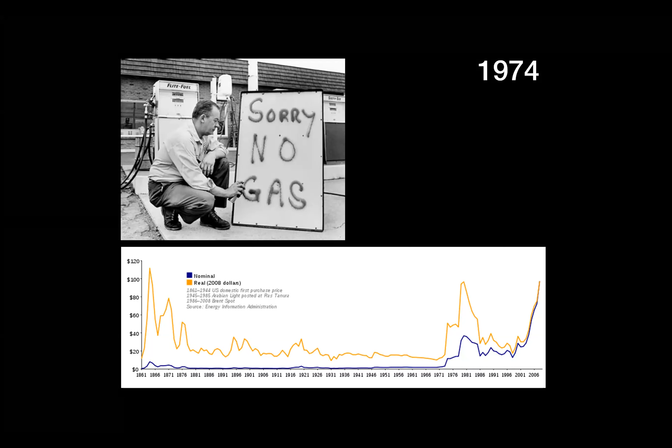And still not, it's a real delay. Should I click through it? Yeah, I'll click through it now. Okay, I'll just say next. Okay, right.

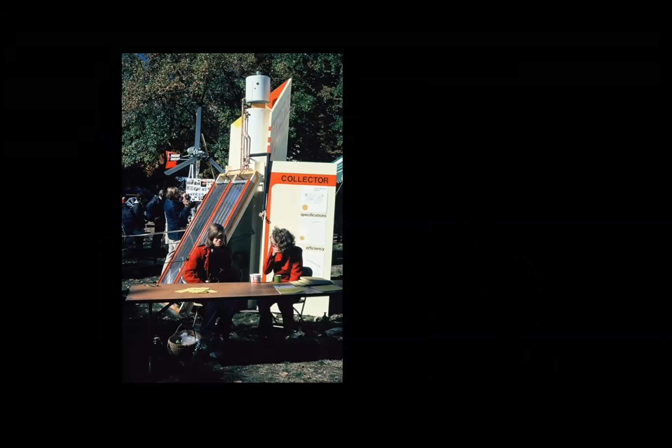So I was in the midst of a course where I was looking at environmental design and architecture. We were looking at these kinds of things, and because people perceived there was a lack of fossil fuels—not fossil fuels damaging the environment, but a lack of fossil fuels—people were very interested in solar energy. So we were looking at architecture like this. This is me and my wife, and we started working with a guy who set up a solar collector business, so this is solar water heating. And I produced this as a thesis at Yale University, which had the posh title of Decentralized Service Systems for Housing.

And some smart guy from a publishing company came along and turned it into a book, called Energy for the Home. This was 1974. Bear in mind this huge shortage, panic shortage, much greater panic than there is now, because people thought the energy sources were disappearing. Anyway, this book sold 100,000 copies in the first year, and we made quite a bit of money out of it, which was very nice.

We came back to England and I finished my architecture education. A year after finishing it, I set up with Richard Fielden, and with the proceeds of that book, we bought a house in Bath, a 5-story Georgian house for £10,000, which you could do in those days. We set up the architecture shop in 1978. We weren't architects, we had hardly any experience at all. We were very interested in building, very interested in energy, and very interested in community. So that was where we were in '78.

In the first 12 years, we bought shops next to it and set up a practice of about 25 people by that stage. This is us all doing our semaphore happy birthday sign or something. But it was a practice that was completely founded on passive solar design, founded on social and environmental principles.

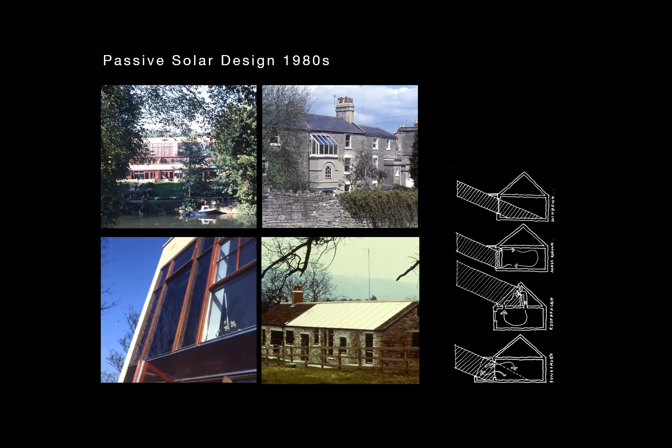We spent a lot of time in the first few years working with this very hippie organization in Bristol. This is about '78 to '80. It's a group of people who wanted to demonstrate how to insulate your home and how to generate solar energy in your home. So this is all voluntary work, working with a local pressure group.

It was called the Urban Centre for Appropriate Technology. Many of you will have heard of the Centre for Alternative Technology - that was a sister organization in North Wales.

We built this extraordinary project - the city gave us an old house to convert basically, and we demonstrated all kinds of ways in which you could insulate and renovate a house. We also talked about building a new house immediately next to it, which is a demonstration solar house.

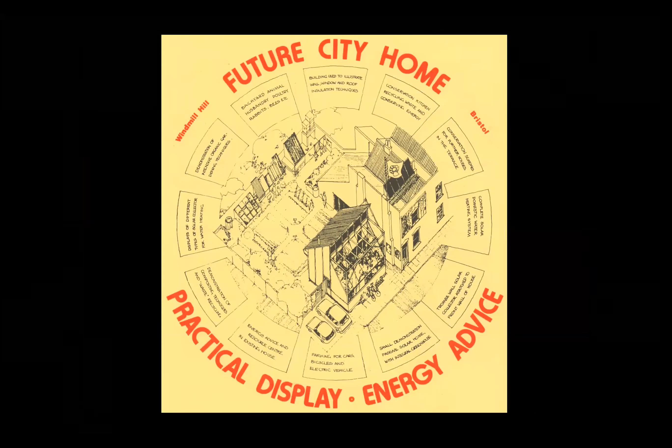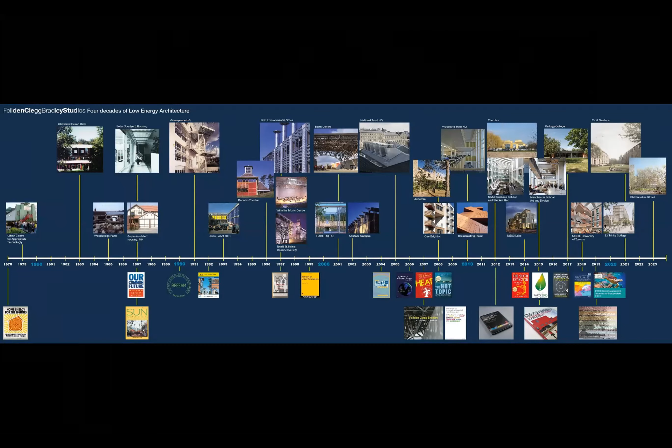So what I want to talk about for the next 15 minutes is really just 40 years of practice after that, starting from that little beginning. This is a chart we did which shows the beginnings of the practice there. I'm just going to take you through a few of these projects that show how we developed our expertise in low energy design.

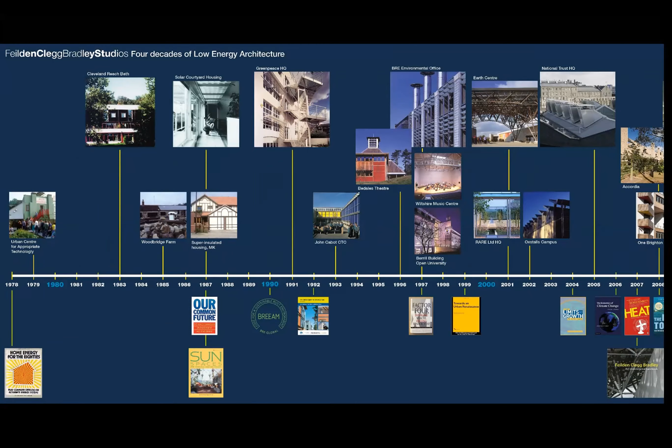So there we are, going right the way through. I hadn't realized this was moving like this. That's okay, that's fine.

One of the first ones we did in '87 was a passive solar house in Milton Keynes. This has actually got quadruple glazing, mechanical ventilation, heat recovery - everything that you would expect these days as kind of standard if you were doing a passive house design. We were worried about overheating, but it didn't overheat.

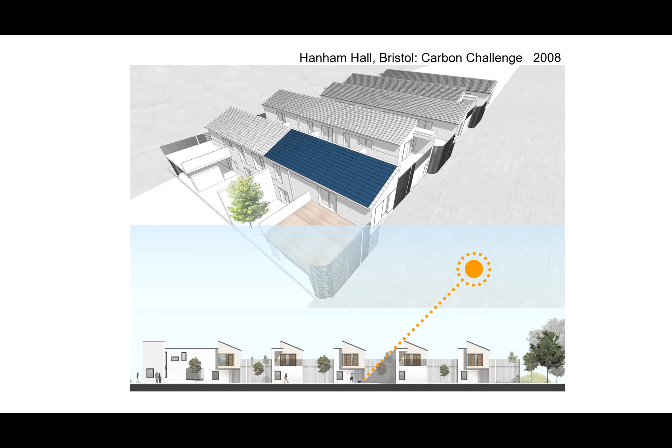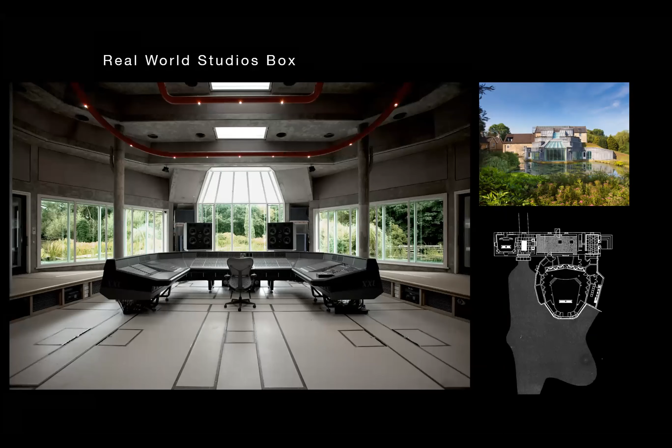At that time we were also doing projects like this, the Real World Studios for Peter Gabriel, which is again a really interesting, completely new type of building - a recording studio in the middle of the countryside, just outside Bath. Fantastic client, great fun.

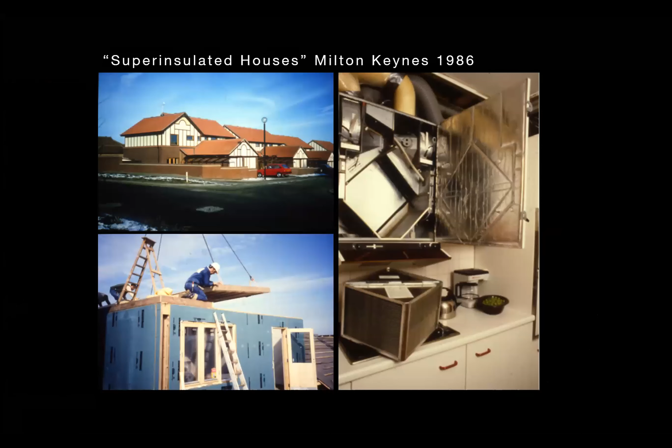We're also doing very tedious looking houses like this, but very different to a lot of houses that we've done. These were super insulated, prefabricated in Finland and brought to the site. No heating system in these houses, just a ventilation system with a tiny 1.5 kilowatt heater battery in it. So no conventional heating system, just relying on a heating bill of £30 a year for this house. We were doing this before people had really invented the whole passive house system, but this was basically to those standards.

We're also experimenting a lot with timber as a biomaterial, as a grown material, as a material that sequesters carbon.

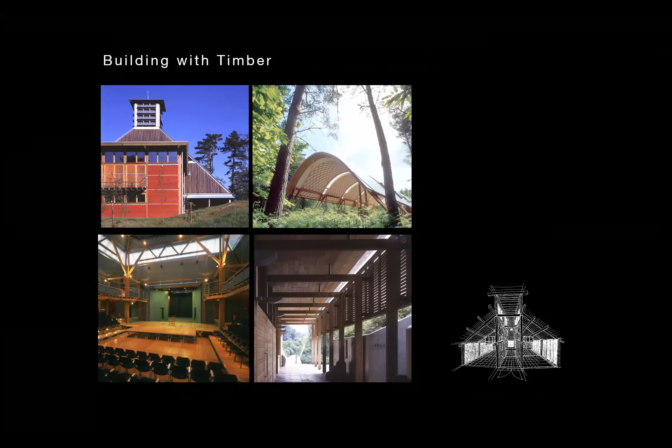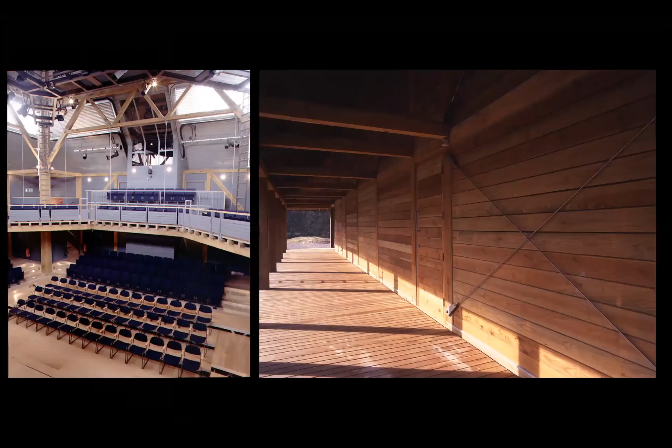In particular, we did this building, which I think is probably the lowest embodied energy we've ever done. This building has no concrete in it at all. It's on some little sheet pile foundations, and it's all made out of indigenous timber, oak frame, larch and Douglas fir cladding. It's a theatre in a school called Bedales near Petersfield in Hampshire.

We're also doing the first commercial building we did, not really a commercial building, but because we'd shown signs of interest in all of this work, Greenpeace came to us and said, we want to convert our building in Islington, which is still their headquarters. So that was quite a breakthrough for us, doing an office building in the mid 80s, early 90s I guess.

Then the BRE, the Building Research Establishment, came to us and said, we want to build an experimental low energy office building, which was a great project to get. So we produced this, and we're now actually converting that after 30 years.

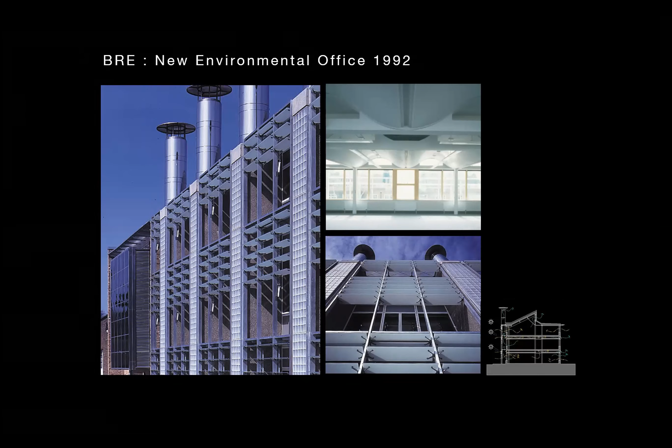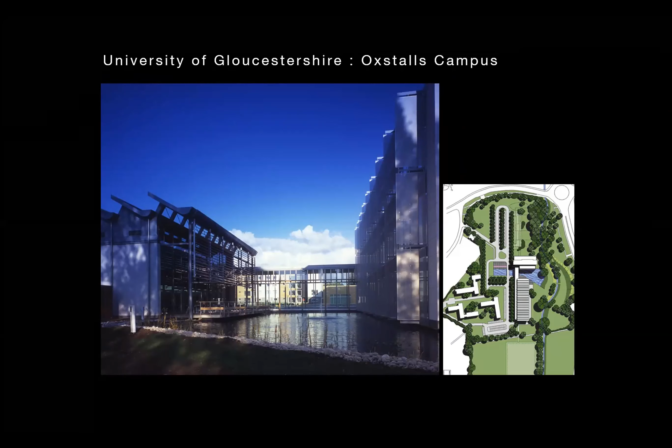And the Oxstalls campus at the University of Gloucestershire. I show this because it's the first big photovoltaic installation we did.

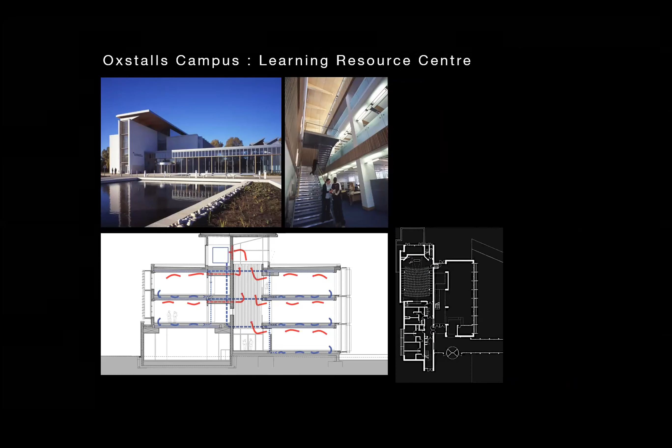Also a building that had an experimental ventilation system, looking at the way you can store energy in the floors of the building.

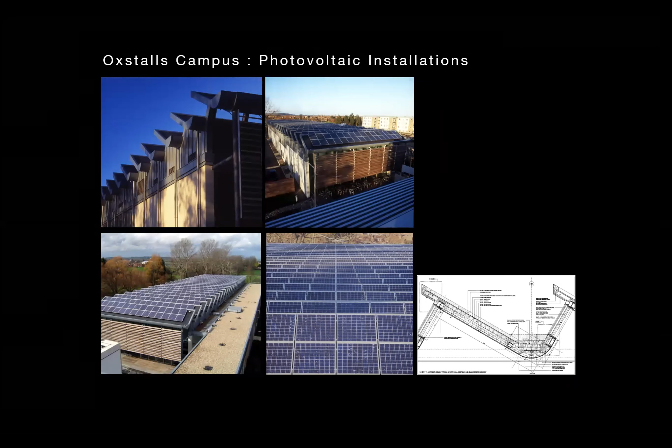This was the PV installation over a Northlight system over sports halls that actually then was a very substantial installation. And this one was the next biggest one, I suppose, that we did, which is a place called the Earth Center, photovoltaic canopy structure.

Designed with some amazing engineers and built by some amazing carpenters, in fact, using waste wood from Scottish pulp mills. This would have all gone into paper mills, but we reclaimed, in a sense, the Douglas fir poles and put together a structure that spanned over this environmental visitor center.

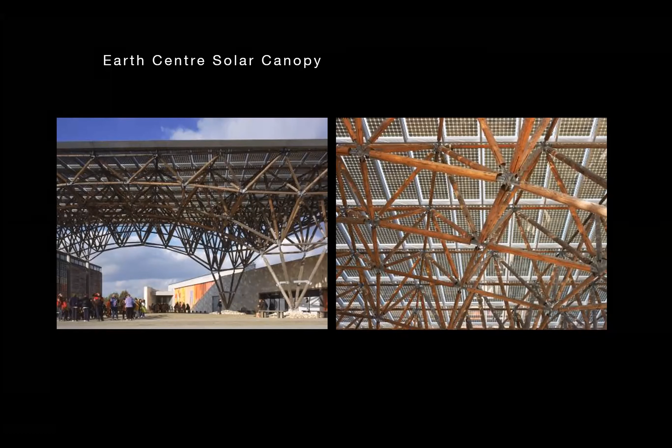Then a fairly big breakthrough in the mid 90s, or actually probably early 21st century, come to think of it—I can't remember when this was now—the new headquarters for the National Trust in Swindon, in the Brunel Yard there.

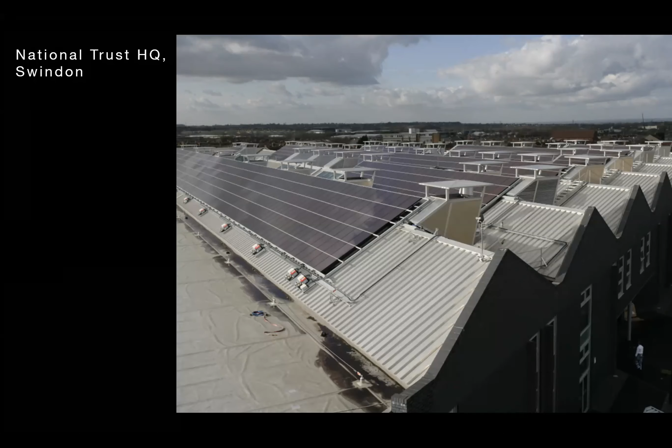Really looking at what the roof of the building can do in terms of absorbing solar energy through PV cells, as well as providing north lights and ventilation. So what you're looking at here is a very ordinary, relatively cheap building designed to sort of institutional development standards, entirely naturally lit, beautifully naturally lit, but quite ordinary shed-like spaces which are inhabited quite high density.

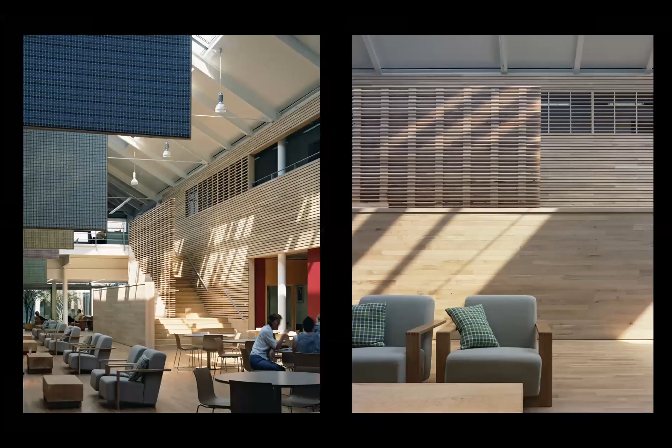Just two images of the interior spaces, again, using timber from about 20 of the different National Trust properties, and a welcoming space that welcomes visitors into the building.

And if you go through just these next four, basically what we're looking at here is a system that we developed with Max Fordhams, the environmental engineers, looking at how you measure a building and what's good practice in terms of kilograms of carbon dioxide per square meter per year, best practice of innovative and pioneering design.

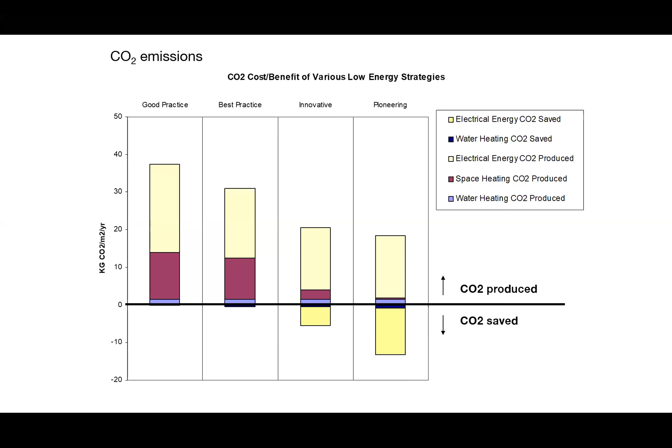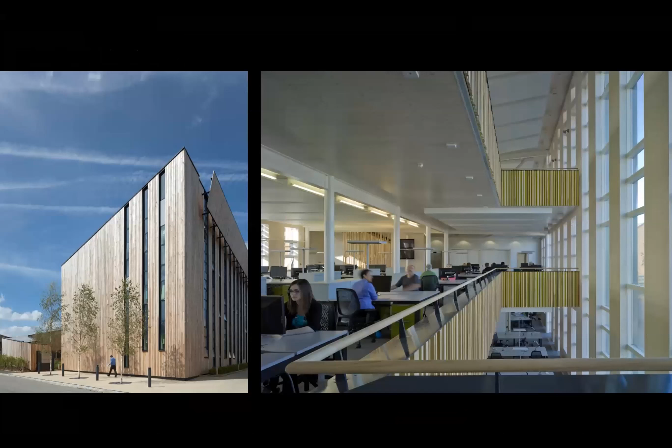Again, a very low embodied energy building here for the Woodland Trust in Grantham. Everything was made out of timber, including the floor plates, the walls - everything came to site as big cassette panels out of timber. It was one of the cheapest buildings we ever created, and also one of the best performing.

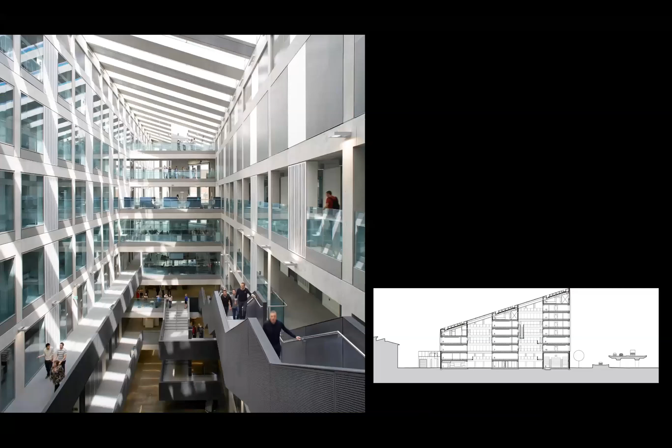You can see the section through the building on the right-hand side there, with two strong atria spaces providing natural light right the way down into the space, and plant rooms on the top, and a south-facing roof slope covered with photovoltaics. So on a much larger and almost industrial institutional scale, we're using the same principles we've used elsewhere.

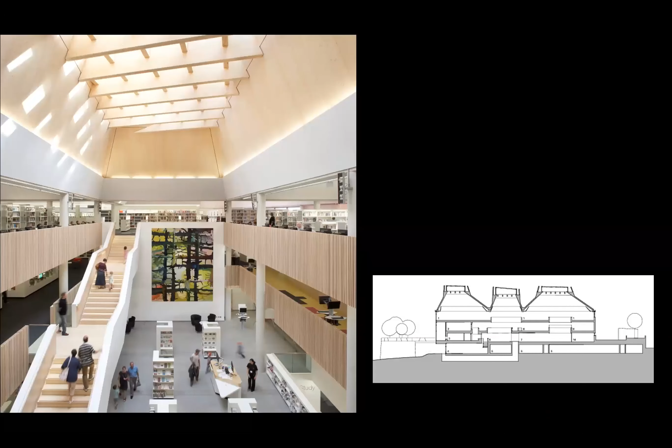And another university and city building - this was the City of Worcester Library, interesting from a perspective using lots of timber construction for these pyramidal roofs. Here we're using a completely naturally ventilated system - these pyramidal roofs ventilate through the top, and air is drawn in through underground and underfloor ducts underneath the section there.

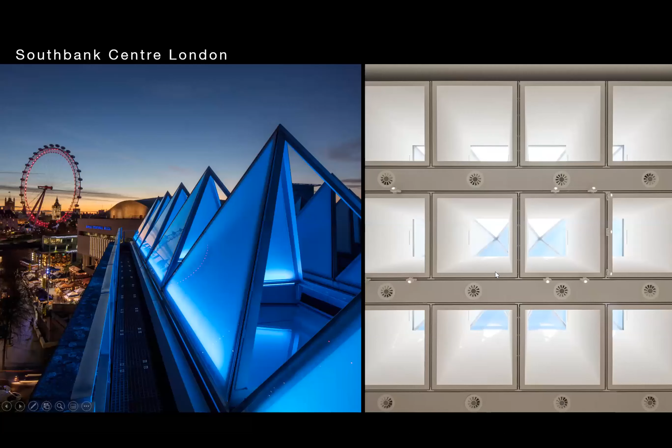We've also done a lot of work on existing buildings. This is the Hayward Gallery, replacing these iconic roof lights with a roof light system that works - the pyramids of glass become the shading devices over the roof lights.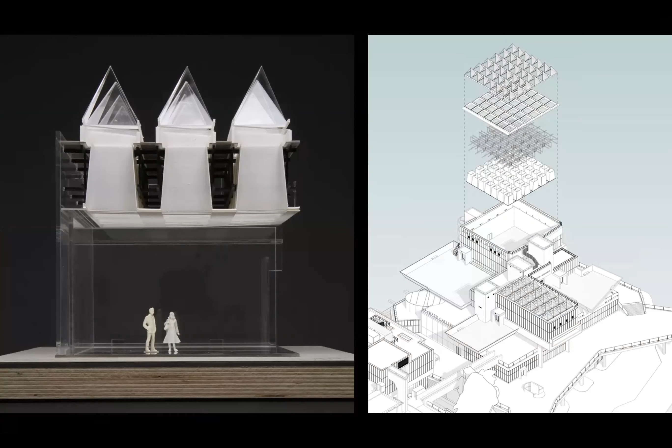Won't go into detail on that, but you can see - looking at the interior design of these spaces and rethinking the mechanical ventilation systems, taking a lot of energy use out of them just by working very closely with the M&E engineers.

Going abroad, going to Toronto, big university building there. We were asked to do that because of our interest in low energy design, interestingly - so it's taken us abroad, having this specialism.

Next one is the first passive house building we did, about 5 or 6 years ago - a very simple little building for the University of Oxford, who at that time had said all of their new buildings were passive house standards. And the next one is a building that we got planning permission for.

This one's in South London, looking at an entirely timber frame building adjacent to Clapham Station. We're looking for someone to build this out - we've got permission for it, and it's pretty much a net zero carbon building. The next one, which Joe might talk a little more about, is on site at the moment.

And here we're looking in intense detail at all of the materials that go into this building. It will be net zero carbon for the first 60 years of its life. It's built to passive house standards. It's entirely timber frame, but clad in brickwork. And it's going to be a really interesting precedent to study.

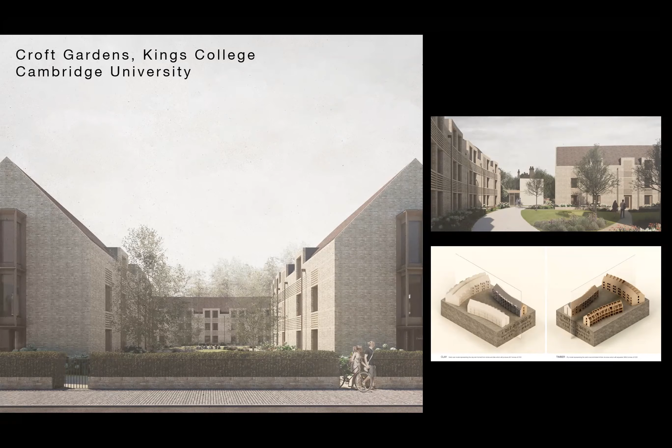Next, and I think that's the end. I think I've almost got through that in 20 minutes. So that's the history of the practice in a kind of nutshell. All I'd end up by saying is that the principles we set out at the beginning of working with socially motivated clients and environmentally motivated clients have enabled us to get the most extraordinary range of clients, as you can see, to work with, from Greenpeace, National Trust, Woodland Trust, all these university sector clients, and a lot of work within the educational sector. Everybody, but now we're doing a lot more work in the commercial sector because they too are very interested in what the future holds for us, for the planet.

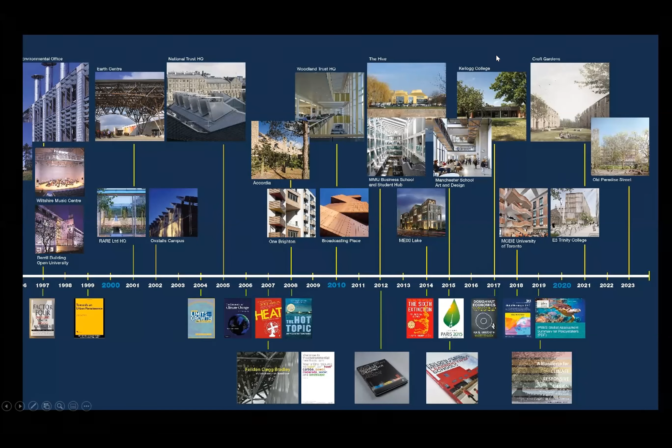I'll leave it there, Joe, and hand back to you.

Great, thanks Peter. And apologies if the slides were slightly out of order. No, a glamorous assistant role, yeah, a bit tricky.

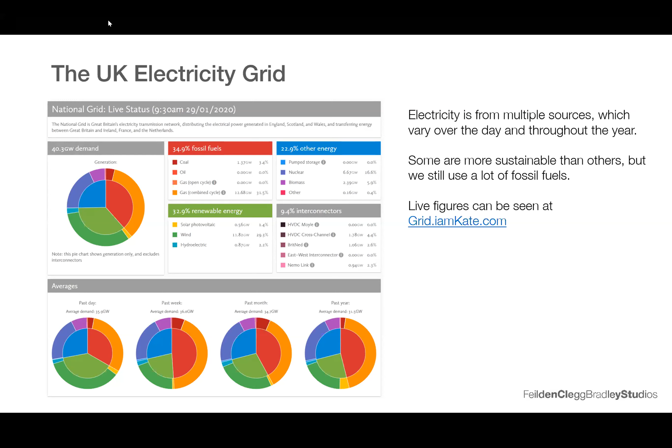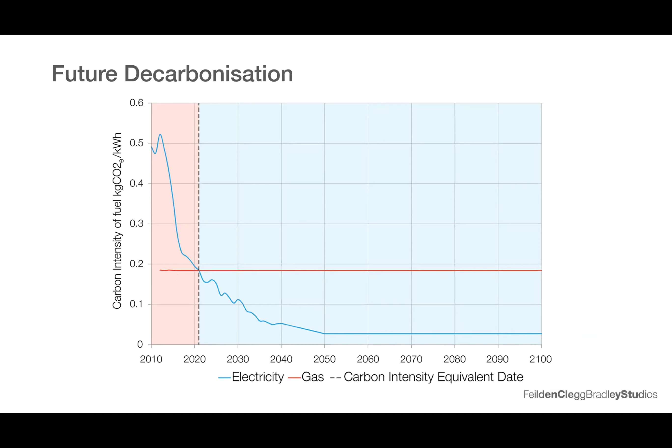So we're in this position where energy is becoming less of an issue in many ways. When we look at global emissions from buildings, this is what we're primarily concerned with. About nearly 40% of all emissions are from buildings. But actually there's another bit we don't talk about: 11% comes from the stuff we make buildings from.

Over the last couple of years this has really matured. Lots of people haven't really been able to keep on top of this, and now we're really starting to see it blossom and become very mainstream.

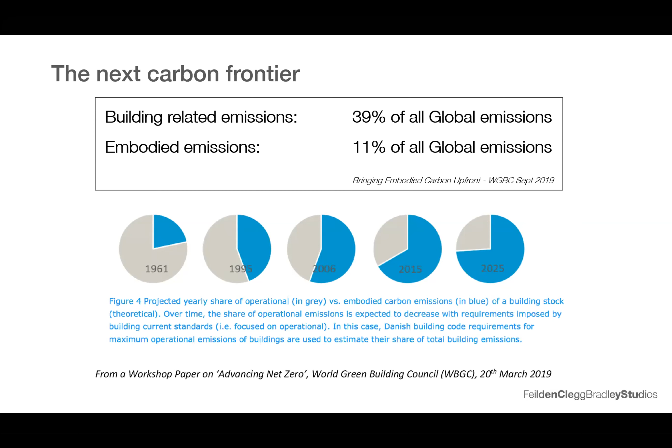But it's kind of a weird one. With energy, we've got meters - we just read the meter reading, send it off to the electricity board, and they tell us how much it's going to cost us, so we can work out the carbon for it. But materials are a slightly different thing to do.

What we have is this really techie life cycle assessment stages - this is for a British standard, though there's stuff for other materials as well. What it does is break down how we assess what's in the material, what makes it. So we've got this first bit, stages A1 to 3, which is cradle to gate - taking this stuff out of the ground, taking it to wherever it needs to go to be manufactured, and making it.

It might be that multiple things all come together, or it might just be one thing, but you can imagine that it can be quite massive.

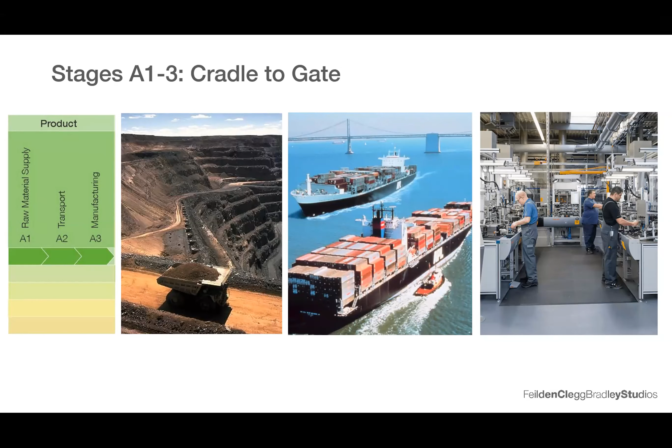Then there's your construction, so how you're building it - how do you get it to your site? Where's the factory it's been made in, and where does it get to from there? Is it being shipped by a big container ship? Is it coming by lorry? Is it being air freighted on a private jet? Whatever it is that's getting it to you, it all has carbon emissions associated with it.

And then how do we build it? Weirdly, when we think about building, we think of big JCBs or cranes and all that energy being used - typically not so bad. The big thing we do is things like plasterboard: we might throw away 10 to 15% of our plasterboard because we're cutting it to shape and just chuck it away. That's 10 to 15% more carbon instantly from that material. So it's about thinking about wastage and how we use that.

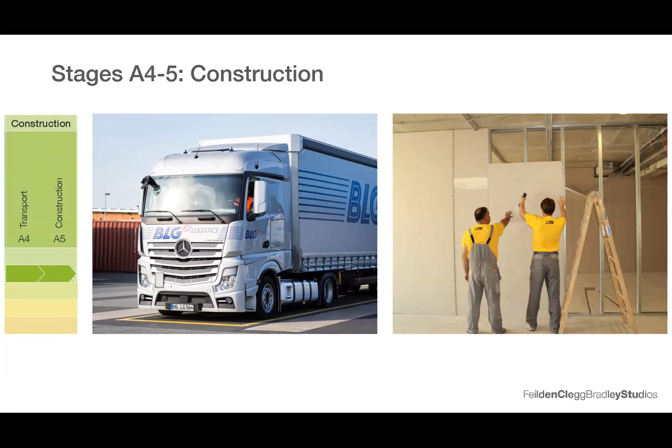And then there's this kind of operation side. How do we use the things for our buildings? Is it going to emit carbon just by being there? Some things will release CO2 as a byproduct, or refrigerants or something. Then we've got to look after it, maintain it, clean it, maybe give it a lick of paint, repair it. Maybe it needs a new door handle, a new window, bit of seating or whatever else. And eventually it'll just be knackered and it needs replacing.

So how often is that? Is it 5 years, 10 years, 100 years? Understanding the longevity of the components and how you replace them is key. Really think about that. And then also, if you take it out, can you refurbish it and put it back in? That'd be amazing, rather than getting a brand new bit of stuff shipped from wherever.

These two here are about operational. There's water use. We don't talk a lot about water, but we really should. It doesn't really have a lot of carbon emissions associated with it, but it's a precious resource. So that's something that's really key.

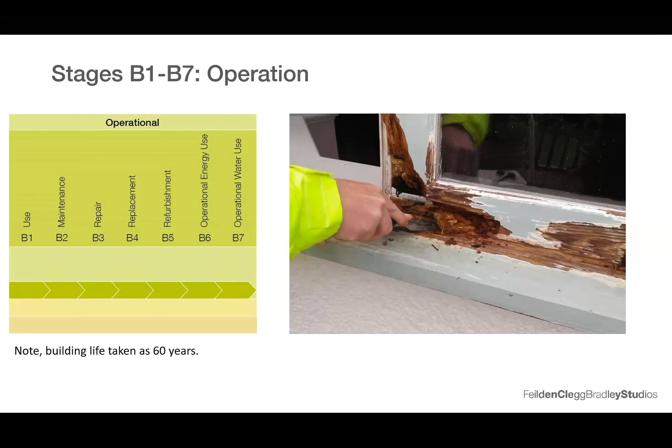And then at some point, nothing lasts forever, it's got to come down. Is it a big JCB that piles in and smashes it all up, ships it out to landfill? Maybe it doesn't make it to landfill, maybe it gets burnt and it turns into energy for a suburb of London or wherever else.

Can you separate the items out so they could be recycled? Think about if they're glued together, you can't really take glue apart. If it's mechanically fixed, you can just take the screws off and you can have your steel and your wood or whatever else. They can go to their own special waste streams where they can be processed properly. So think about all these kind of bits. It really feeds into this next life bit.

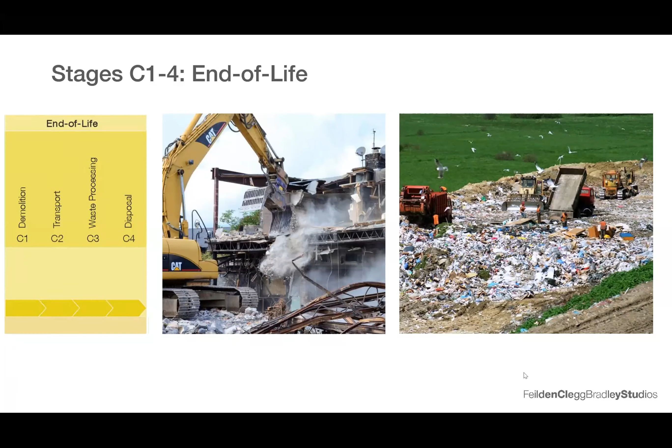Understanding what is it that stops you just reusing something in the first place. So always go for reuse. If you can get something reused, it's very low energy, very low carbon, it's perfect. If you can't do that, can you recover some of it? Can you repurpose it? Can you clean it and alter it in some way? And the very last thing you do is recycle it.

Recycling very often means you get a lower grade material out at the end of it. There's lots of people working on how do you go from a material to a higher grade. That's one big avenue, really interesting. Anyway, so well worth a look at.

But how do you design things to enable that? It could be, for us, things like structures that are bolted rather than big concrete things which are cast in. How do you take them apart? So, really interesting, pioneering bit of work.

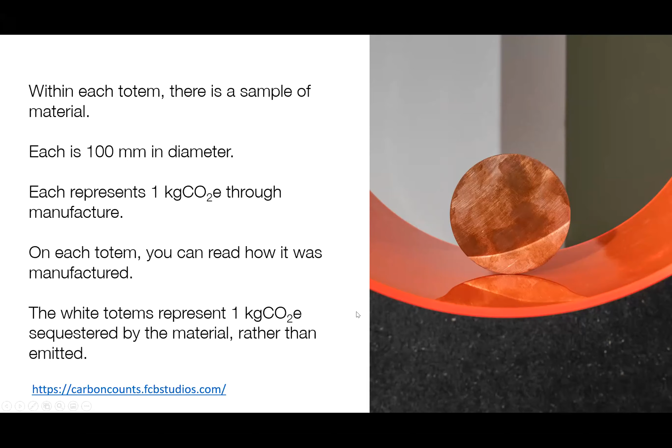We've turned it into a web page so you can all go and have a look at it there - it's well worth a look. It's got a bit more discussion, you can look at all the different materials. Each one has a little idea of just what it's taken to go from nothing to that material, really quick, nice and easy. It's only A1 to A3, so it's only cradle to gate - we haven't done transport to site and these kind of things.

So kind of interesting - the other thing we have are white totems. That's where materials have absorbed 1 kilogram of carbon out of the atmosphere. So this is a lump of cross-laminated timber - kind of a nice little thing you can compare. We have a bamboo one as well.

So we had two, and the bamboo one is much bigger because you need far more bamboo to absorb 1 kilogram of CO2 - so it's not quite as efficient. Plus you need to compress it and squish it and glue it and stuff.

That's great - embodied carbon's fantastic, I could talk about that all day, and I do quite often. But I can hear you all asking, I'm sure, what about everything else? That's one thing, isn't it? So this is what's emitting CO2 in the UK: electricity, it's residential, it's people, it's transport, it's businesses, it's agriculture, it's a very little bit of waste, interestingly.

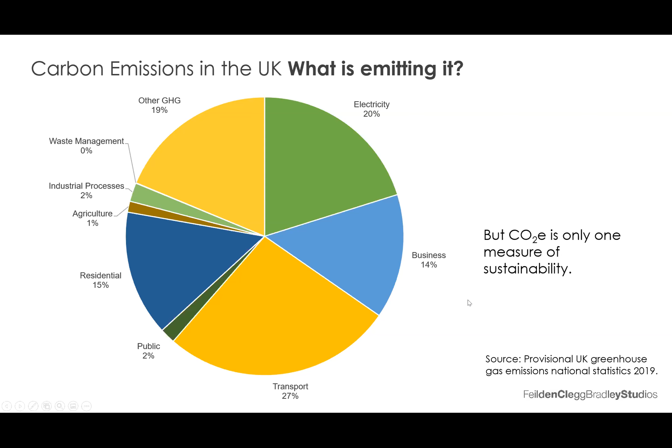But CO2 is just one thing, isn't it? It's very easy to focus on one particular aspect, and I do worry that we miss some of the beauty that sits around other places. So we have this here, which is our footprinting and biocapacity - I don't know if you've come across these kind of footprinting exercises. What we're effectively saying with these ideas is this is how much space is on the planet to create crops or grow livestock or whatever else it is, and this is how much we require. You can make a really quick idea of how much that footprint is in terms of global footprinting - so this kind of exercise.

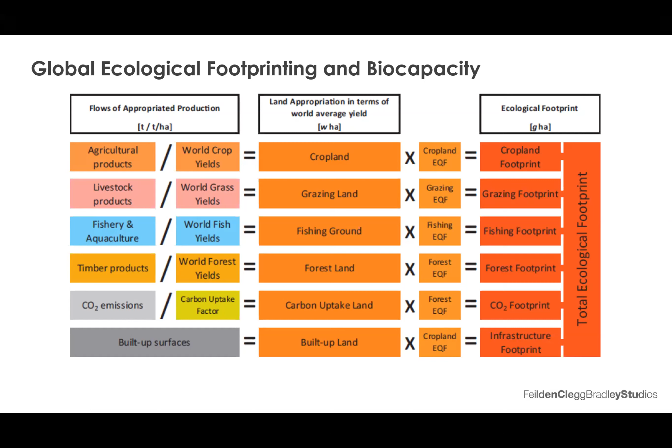It's actually really quite tricky to do, but there are institutes that do it. There's the Stockholm Environmental Institute, I think it is, they're kind of leaders for this.

In the UK, we use 3 planets worth of stuff, infrastructure, whatever else. It's a bit about home energy—the lights, computers, laptops. A bit about transport and how we get around—cars, bikes, even public transport. Food can be quite big, particularly if you're always eating steaks and burgers. And then the goods and our consumerist lifestyle—the things we absorb and use, clothes, whatever else.

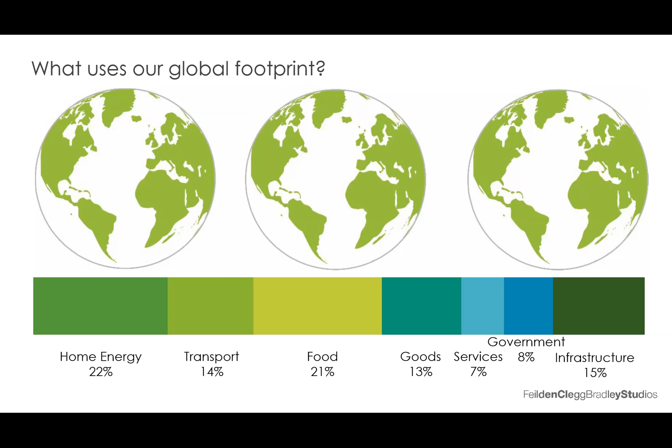We use One Planet Living as a way of assessing this. Instead of just focusing on one aspect of carbon, we use these 10 One Planet principles to get a broad, holistic overview. It's much broader than even the global footprinting I was showing earlier, and it's a way of thinking about sustainability that I think is incredibly useful.

There are other bits—land and nature, water, food, travel and transport, materials and waste, and energy—all hugely important, all have a piece to play, and all as equally important as each other in many ways.

Just a quick note on how you actually create a plan, because I know the aim of this is you'll be making a manifesto at some point. Visioning—we do a bit of visioning, that's the first step. Then we talk about how we do it, and think about what the outcomes would be against each of the principles.

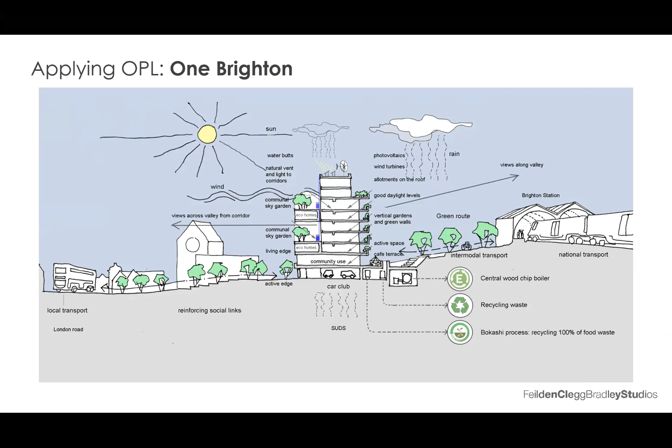But it wasn't just that. There's a nice picture of the allotments again, and the healthy materials and all that loveliness. But actually, we looked at the process of how you do it as well. So biodiesel for contractors' vehicles - back 10, 12 years ago, that's about the best thing we could do to reduce that. Electric vehicles didn't really exist. A green travel plan, so we had lots of showers so people could take the bus or cycle or whatever else. The healthy canteen on site was supposedly the best canteen on site anybody's ever had. And also, things like membership of local wildlife trust for contractors. A lot of these contractors probably hadn't had access to that. So how do you create that leveler for them?

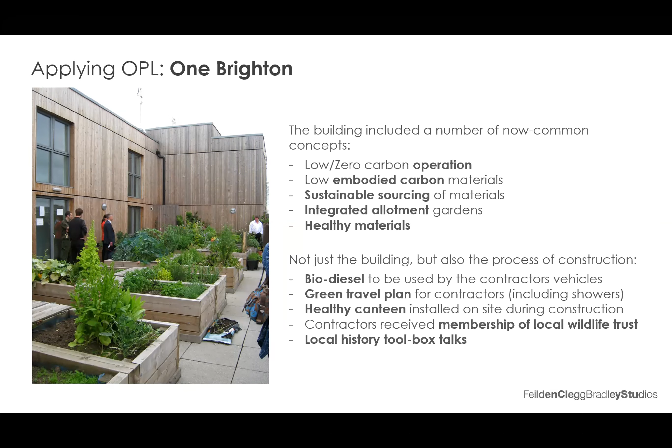Really lovely. And local history toolbox talks - somebody come in every day and say, look, this is this, this is this, this is the history of the place. Lovely, just for the contractors, you know, often maligned. So that's a really quick whistle-stop tour of embodied carbon and One Planet Living.

I'll stop sharing my screen. We can, if there's any burning questions, we can pick them up now. Yeah, put them in the chat. I mean, if we get anything now, then great. But I am suspecting that people might have questions to ask now, but it might be towards the end of the talk.

Sure, yeah. So in which case, I'll hand over to Charlotte then. Yeah, brilliant. Thanks, Joe. That's great. Cool, so, okay. Charlotte, if you're ready.

Yeah, sure. Just give me 2 seconds. I'll start sharing my screen. Oh, you're very quiet there, Charlotte. Oh, am I? Yep. Is that any better? Just a little bit. Sorry about that. I will try and shout very loud and clear. Very good, hopefully not deafen you all in the process. Okay, 2 seconds, there we go. I'm sharing now. Let me know when you can see it. Yeah. Yeah, is it all good?

Yeah, great. Cool. Okay, so hi guys, thanks for joining us all. Thanks to Joe and Peter as well. And I'm going to talk to you about one of our projects today at Feilden Clegg. So I'm Charlotte Knight, I work at Feilden Clegg Bradley Studios, and I'm going to talk to you about Pea Soup House. This is a project that we did in 2016 in the practice.

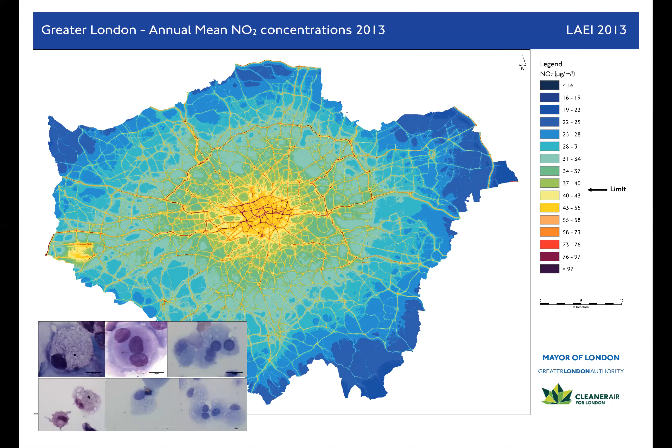So we were really interested in the data related to air pollution. King's College are in charge of monitoring and recording from different stations around London, and this is some of the data they've provided.

We wanted to take this and translate it into something, because air pollution is an invisible thing for us nowadays in London. Back in the 1950s Industrial Revolution, you could see air pollution—it was thick, sulfur dioxide, yellow fog. It's invisible now.

So we wanted to take this and make it into a visual architectural representation for people to see, in order to communicate and share with local communities.

We collaborated with King's College and used their data collected around London, and also their measurement system, which you can see in this colour diagram in the centre—this is their DEFRA air quality index that they use to measure it.

It's a sliding scale system, from 0 to 10. 0 is green and very low air pollution, and up in the red, the 10, is really, really high air pollution.

This diagram shows each day in Euston Road and what the air quality measurement was that day. You can see where you have really bad days down here in purple and red, and really good days green up here.

So this was a great way of making air quality visible. Playing on the term 'pea soupers,' the installation we designed was called Pea Soup House, to create a visual representation of air pollution as the first step to improving air quality.

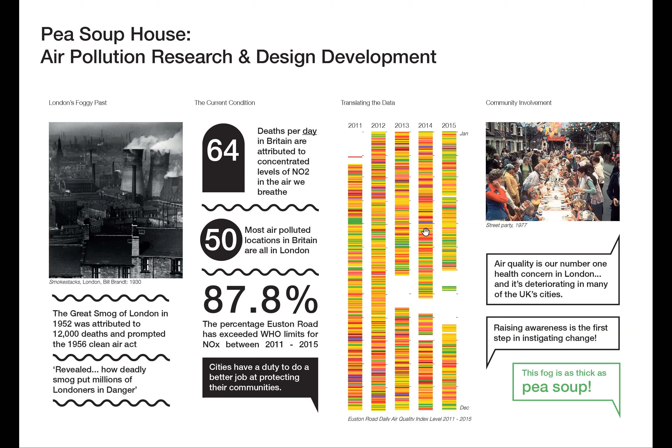We decided to do this in the form of serving soup from the structure. The flavour and colour of the provided soup is matched to the daily air quality index I just mentioned, and it quickly allows people to visualise their local air quality.

You can see here, on a good day you'd be served a pea and mint soup, and on a bad day, maybe a beetroot and horseradish. Luckily, we didn't need to serve that one at the time we were running the exhibition.

It was a cool way of engaging the local community through food—I mean, who doesn't love food? And the project helped raise public awareness of London's air quality through architecture, education, and event.

This is a drawing of our proposal for the structure. We decided to use timber battens, and each batten was painted to a colour representing the day of the air pollution from the data we had on Euston Road for 1 year.

Each side of an elevation of the structure had, you know, summer, winter—each of the 4 seasons on it.

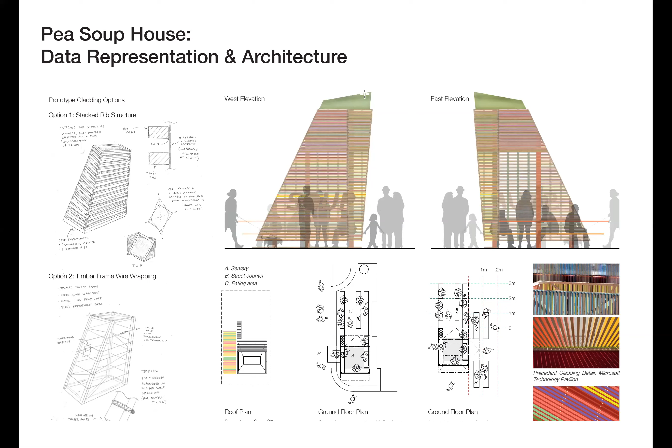And we decided to use low-cost carbon neutral materials, which created a sustainable structure, but it also made it really easily transportable, which was another method of being a little bit sustainable about our design.

So this is our final proposal that we submitted, the soup servery. The idea is that you come along the street and you'd be served soup out of the little hatch here, but you could also come within the structure and meet and engage in dialogue and conversation.

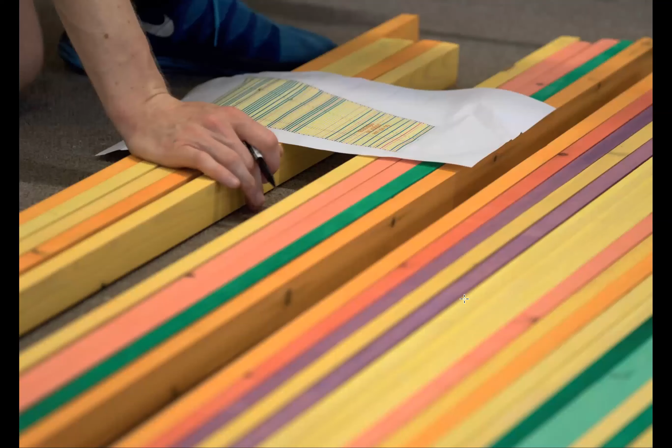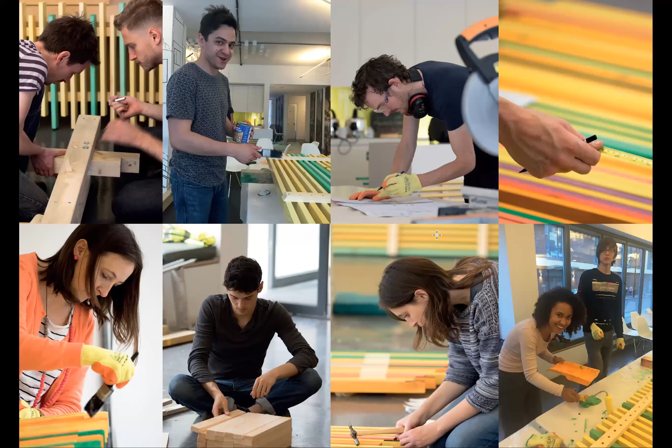This is just an image showing how we took that data and started to apply it to the building. And these are the most vital people ever in this project.

Our volunteers helped us throughout the whole project, from the early stages of design development up until construction, and came in and helped us every weekend to get this going, including our very own Joe as well.

Thanks, Joe. And then this was the final thing, getting it out onto the street and in use. So the most important thing about this project for me was the cross collaboration that we had on the project. We developed a multidisciplinary approach, working with many different people.

I've mentioned King's College already, who helped us with the data and translating it, as well as lectures and talks. We worked with Expedition Engineers, who were instrumental in the design of the structure, providing structural calculations. We also used Studio Mothership, who created the graphical appearance for all our exhibition work housed inside Pea Soup House, our flyers, lectures, talks, any graphical representation needed.

I think the most important collaboration was with the RIBA Young People's Forum, a group of young students at the Royal Institute of British Architects learning about architecture. They helped us from the beginning, right at the early design stages, where we held workshops with them. We all collaborated, got each other's ideas circulating, and tested out small ideas for Pea Soup House on little models, designing the color arrangement, etc. That was really great fun.

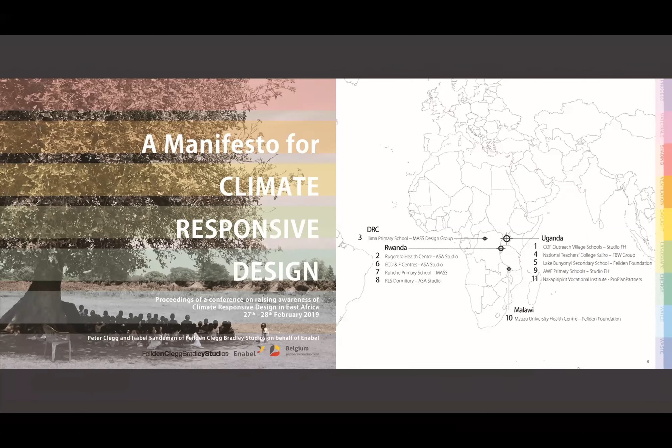So in response, we structured the book to teach the climate responsive design theory through a series of real life built exemplar projects from across Uganda, Rwanda, the DRC, and Malawi.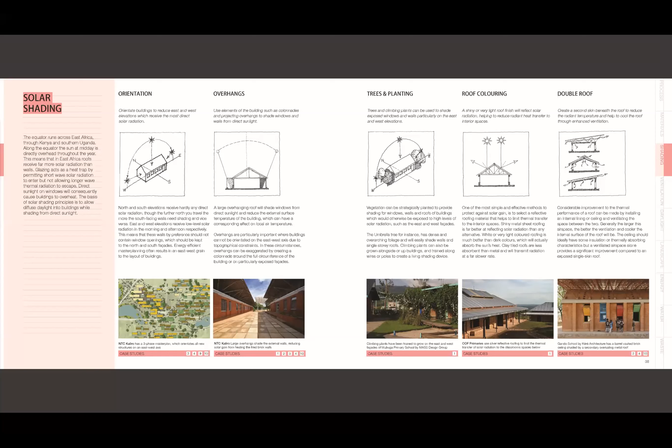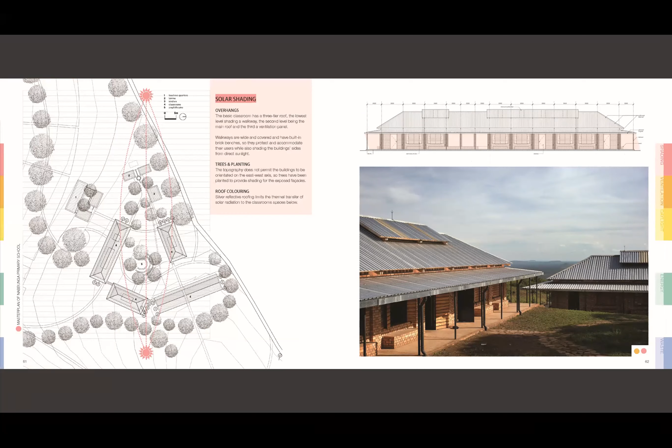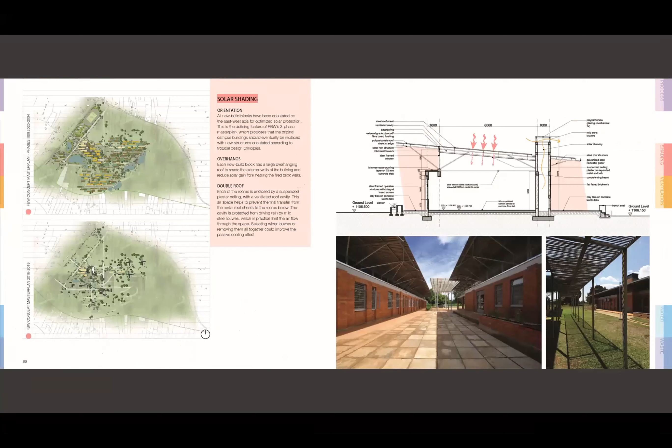And then these were fed into the practical application that was shown through a series of case studies. This is the Cotton On Foundation Primary Schools by Studio Felix Holland. This is Ilima Primary School by MASS Design Group. And the National Teacher Training College by FBW Group.

So what this structure did was enable us to provide an informative publication that would aid professional development in the region, but also provided a platform by which to showcase local practitioners' sustainable projects and innovations.

So the book defines 9 key themes of climate responsive design: engaging in a participatory design process, sustainable material selection, solar shading principles, passive ventilation mechanisms, how to achieve good natural daylighting, strategic landscape design, renewable energy systems, water supply and storage, and sanitation and hygiene.

Those 9 key themes broadly overlap with the United Nations Sustainable Development Goals, which I'm sure you guys know a little bit about. The principles of climate responsive design relate most specifically to SDG 3, promoting good health and well-being, 11, creating sustainable cities and infrastructure, and number 13, promoting climate action.

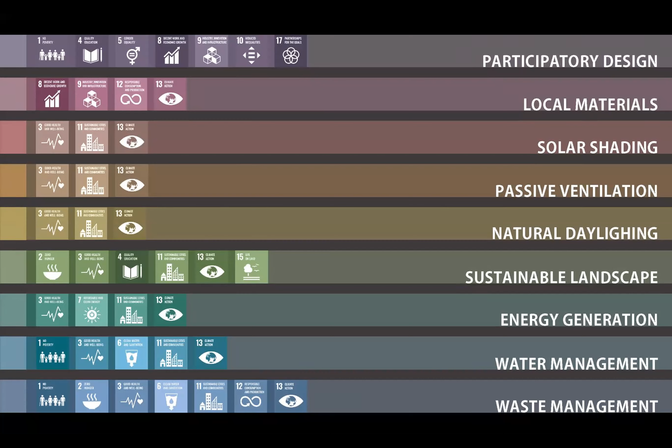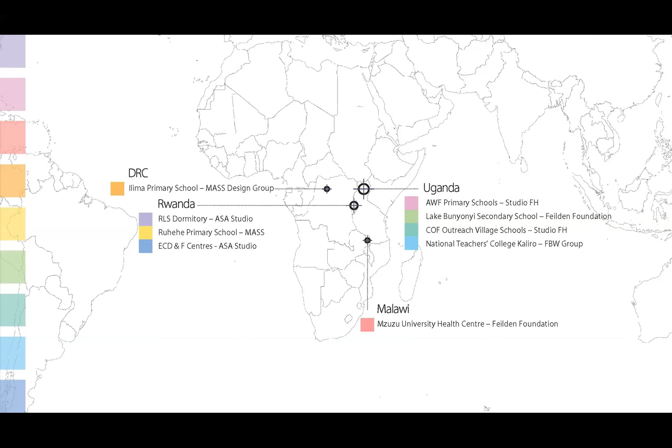So each theme in the book is color-coded and then is linked to specific aspects of each of the case study projects. And the exemplar projects that have been chosen represent a new generation of architecture in East Africa, which has a developing understanding of how the built environment can adapt to and help mitigate the impacts of climate change and biodiversity loss.

So for the purpose of this presentation, I've just picked 4 themes and 4 corresponding case studies that will give an extremely brief overview of the book's content.

So this is the African Wildlife Foundation's Conservation School, which is by Studio Felix Holland, or Studio FH, who are based in Kampala, Uganda. The project is located in extremely rural, remote Uganda.

So it was essential that the building materials were sourced locally. By using local building materials, you can save money on transportation costs, reduce embodied energy, and create local opportunities for employment, as well as ensuring that the buildings can be easily maintained if they deteriorate. And that increases the long-term durability, which further decreases the lifetime carbon emissions.

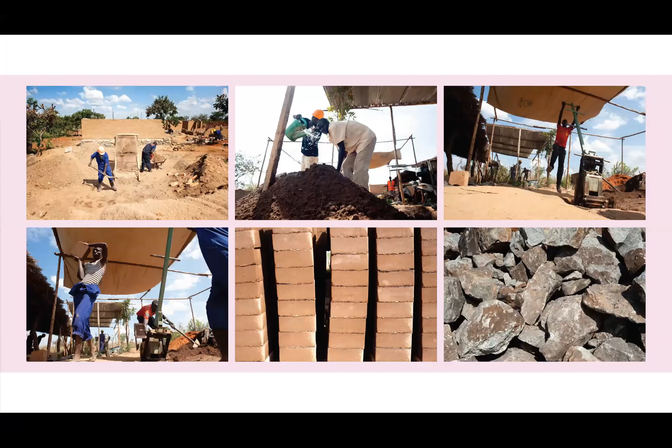In East Africa, soil and stones from the site are the most basic, sustainable, and readily available materials to build with, followed by materials that are grown locally in a managed ecosystem, such as timber or bamboo. East Africa's famous red earth provides numerous low carbon building solutions, which may be as simple as mud mixed with straw to make cob, or soil which can be stabilized with lime or cement.

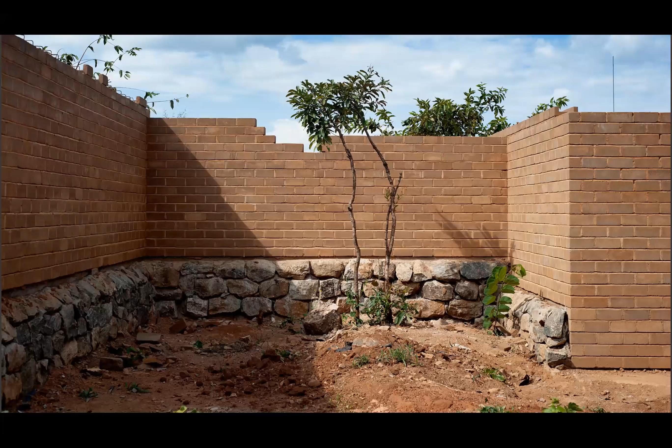For the AWF conservation schools, Studio FH elected to use local granite for rubble stone foundations and a semi-dry stack plinth, with compressed earth blocks used for the upper part of the walls. The blocks are 220 mil compressed stabilized earth blocks, or CSEB, comprised of a mix of cement, sand, and soil in a ratio of 1 to 4 to 8.

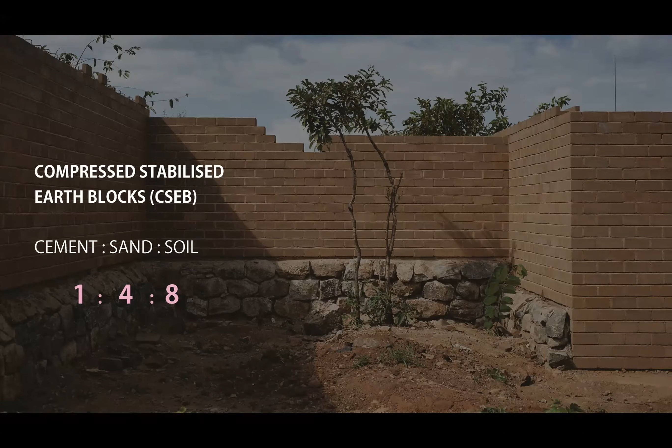Instead of a typical concrete ring beam, the buildings also have a reinforced masonry ring beam, comprised of compressed earth trough blocks with a reinforced concrete infill. The result is a monolithic, near carbon-free wall build-up, made entirely on site by masons who are just trained in conventional blockwork masonry.

The next example I'm going to talk about is solar shading. This is a bioclimatic design principle where the basic idea is to allow diffuse daylight into buildings while shading from direct sunlight. A large overhanging roof, like the one seen here at our Mzuzu University Health Clinic building, provides shading to the windows and external walls, which reduces the external surface temperature of the building.

Mzuzu is located in Malawi, just south of the equator. The sun here at midday, and across East Africa, is almost directly overhead throughout the year, which means that north and south elevations receive hardly any direct solar radiation at all, while the east and west elevations receive low-level solar radiation in the morning and afternoon, respectively.

The buildings are therefore orientated on the east-west axis. We put the openings predominantly to the north and south, and they're also offset from one another to ensure free-flowing movement of air. We also made substantial effort to retain existing trees wherever possible in order to maximize shading of the east and west elevations.

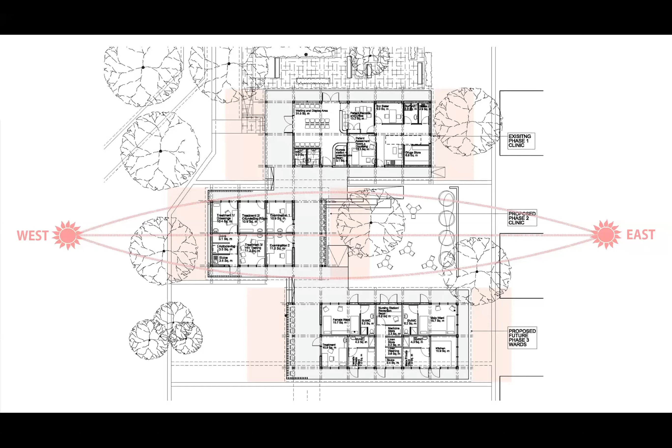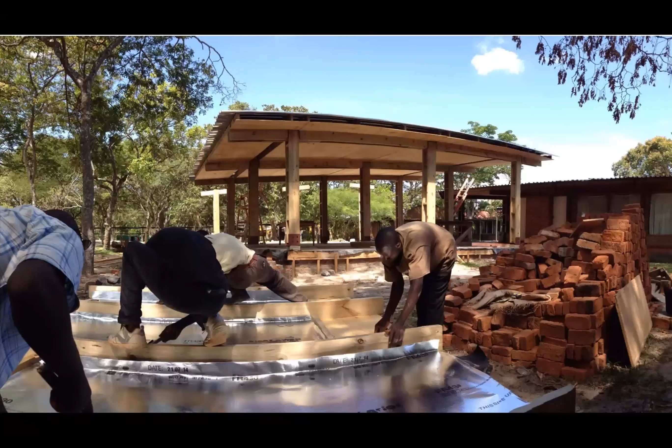The health centre also uses shiny galvanized metal roofing sheets, which reflect solar radiation, helping to reduce radiant heat transfer into the interior. The roof structure has a modular cassette design with an inbuilt ceiling and ventilated airspace, which helps to keep the building cool, as well as concealing the plumbing and electrics. The cassettes are lined with reflective foil lining, which further reduces radiant heat from penetrating into the spaces below.

The next bioclimatic design principle is natural daylighting, which obviously helps to reduce the need for artificial lighting and improves the health and well-being of occupants. Good classrooms need to have quality diffuse daylight, with blackboards, desks, and benches where children are working being sufficiently illuminated to facilitate comfortable reading and writing.

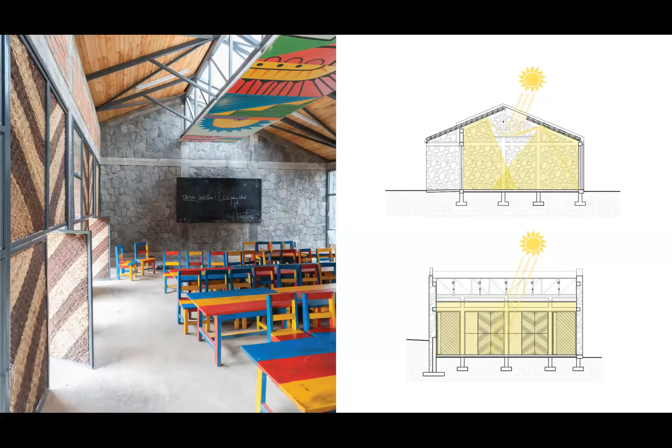Ruhehe Primary School by Mass Design Group is part of a vision by Mass to redesign learning environments in Rwanda. The new classrooms at Ruhehe have light entering from opposite sides of the room and from above through polycarbonate roof lights, which create a balanced and even distribution of daylight internally.

Roof lights actually emit 2 to 3 times as much light as regular windows, but they can cause glare and solar gain if designed incorrectly. To combat this, Mass designed vibrantly decorated light shelves, hung below the ceilings to provide shading from direct sunlight, while also transmitting it back into the room as diffuse daylighting.

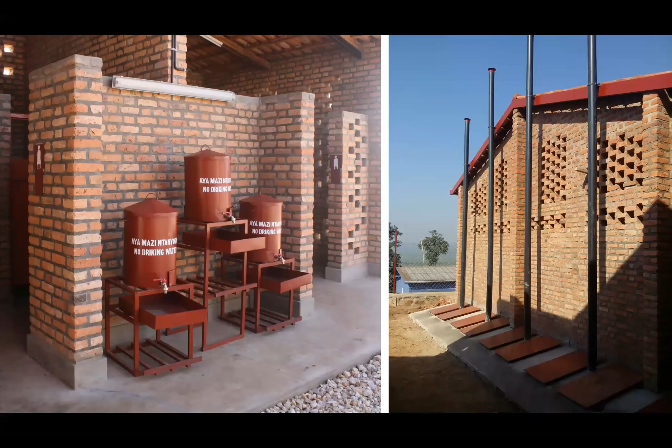Finally, we'll look at the waste management strategy at the Early Childhood Development and Family Centres, by Active Social Architecture Studio, who are based in Kigali, Rwanda. The centres provide communal water sanitation and hygiene facilities, or WASH facilities for short, for the local community's daily use. Each WASH block is equipped with ecological sanitation, or eco-san, toilets and child-friendly hand wash stations.

Eco-san technology basically diverts the urine from the feces in order to ultimately use both for agriculture. The liquid waste is piped to a tank for use in irrigation, and solid waste is collected and combined with layers of ash or sawdust to keep the composting chamber dry. Constructing the toilet cubicles in pairs allows for one to be in use while the other goes through a composting cycle of around 6 months, after which it can be emptied and used as fertilizer.

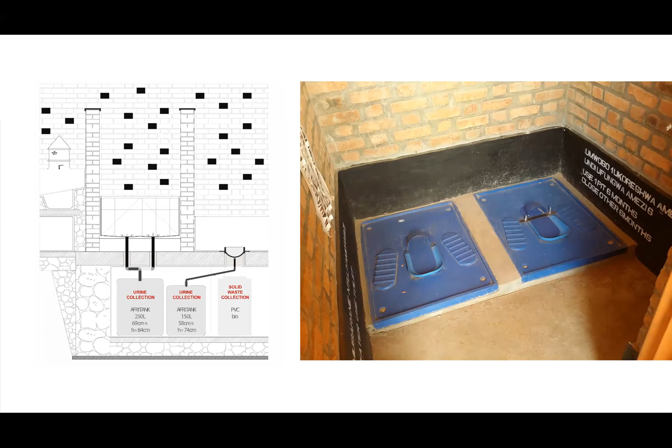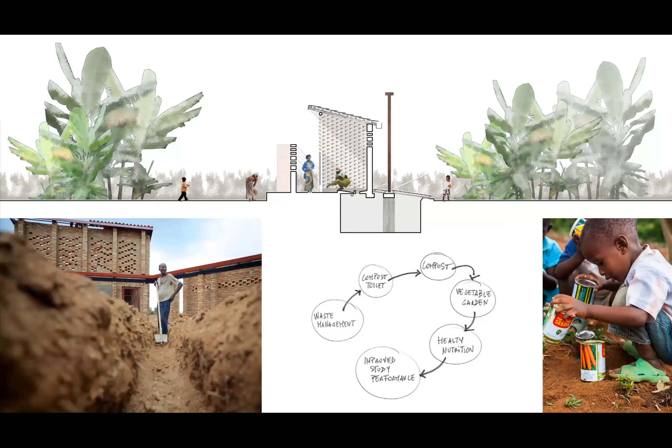So the waste management strategy at the ECDF centres is part of a holistic system that turns human waste into nutrients for crops in the on-site kitchen garden. And this helps to ensure high yields, which translates into improved nutrition, better health and well-being amongst students and the wider community.

So that's a very concise snapshot of just a few of the themes in the book. I obviously haven't been able to give an overview of everything, but I'm just going to give a quick summary of our principles of climate responsive design, which are as follows.

First, to involve all project stakeholders in every stage of the design and construction process for low carbon, long lasting buildings. Leverage the construction process to build local capacity and provide training and work opportunities for the local community.

Use local materials with low embodied carbon, which are preferably grown or recycled, such as responsibly sourced timber from managed plantations.

Utilize passive ventilation strategies, natural daylighting and energy from the sun, but protect from solar overheating and glare.

Strategic master planning of biodiverse landscapes can promote health and well-being and provide climatic cooling and mitigate the effects of extreme weather events.

On-site renewable energy generation can cover or supplement energy requirements and help to offset embodied carbon in the building fabric.

Recycle grey water and harvest and store rainwater for reuse and to help prevent flooding and erosion.

Ensure healthy disposal and recycling of human waste, as well as adequate hand washing facilities and clean filtered water for human consumption.